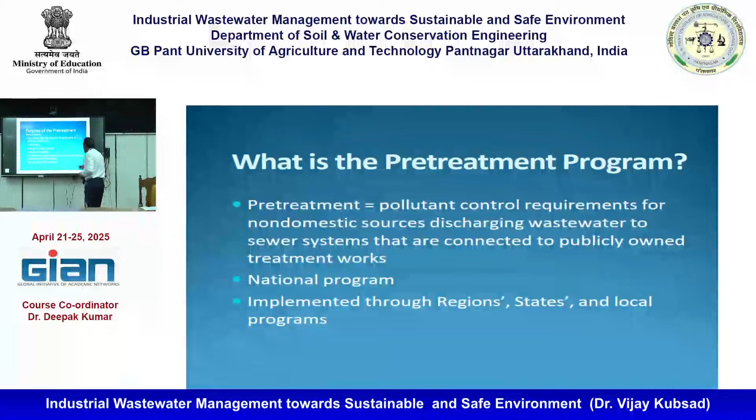So local limits apply to accept the wastewater. Accept means they can have a direct connection to the treatment plant or discharge to the sewer. They just cannot hide somewhere and discharge, there are heavy fines if they do that, because this program requires that whenever a new industry comes into the city or town, they have to get permission from the department on how they will take care of the wastewater generated. There are a lot of slides, but I'll go slow when you're ready.

Okay, the next purpose of the pre-treatment program, what is the purpose of this program? This program aims to prevent the introduction of pollutants into the POTW, POTW meaning the publicly owned wastewater treatment plant.

That way you can understand. Because why they call it POTW means because public money they construct. So they give the credit to the public, not to the government, right? Because your money runs the government. So that is how the US system works. Everything is freedom and pursuit of happiness. That is what the system is, right? So

to prevent introduction of pollutants into the POTW which will interfere with the treatment plant. That is, the city or town which runs this treatment plant has a right to prevent any wastewater coming to their treatment system. They cannot discharge any toxic stuff. They can stop interference. It should not cause any interference to their wastewater treatment plants. But you know how these treatment plants are built, because I also worked in consulting design, so we know the treatment plants we design have some limitations, how much they can treat.

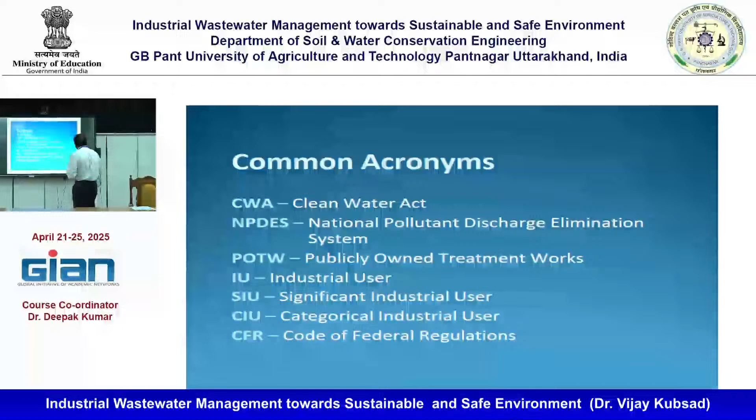Then common terms and phrases, I will go a little bit quickly. Approved pre-treatment program means sometimes the Department of Ecology authorizes some of the cities to run the program on behalf of us. Everything is not done by the government. So we say some cities have resources, staff, funding, everything. So then you run the program on behalf of us under these regulations. So in the eastern region, for example, there are certain cities we authorize. I oversee them. Every 2 years I see what they are doing, whether they are doing any enforcement or not, whether they are monitoring the tributary industries very carefully or not. So if the cities are strong, with more resources, we delegate them. Instead of government, you do it, we will oversee.

But if there are certain industries which are non-delegated, beyond their service area, then the department issues the permit to them directly. We oversee them. They have to report to us directly. Otherwise, delegated means the industries respond to the cities and then the cities respond to us. That is simple, right? So this is the approved pre-treatment program. Control authority, in the sense we tell the city, you are the controlling authority, you oversee all the industrial wastewater discharge, whether they are discharging properly to a wastewater treatment plant, and whether you are discharging to the river or to land application properly or not.

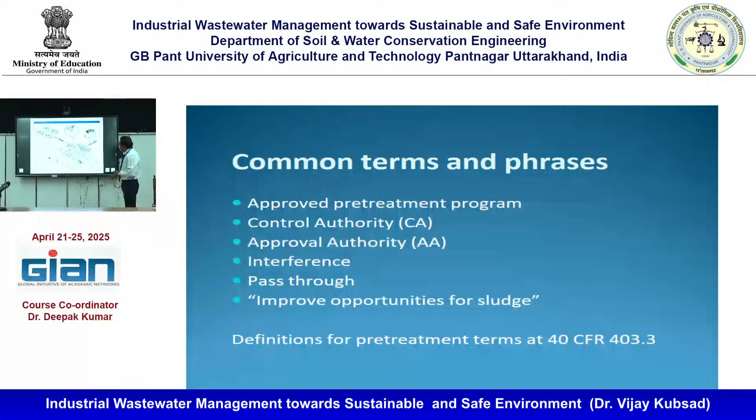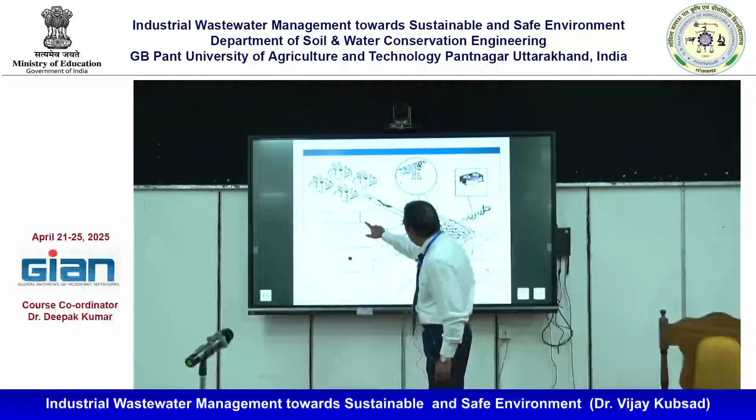So you see here how this program works. This is the treatment plant, correct? And there are different components here. Number one, corrosion of the collection system or the treatment plants, right? Then there are interferences, there are workers, and there is a pass through. The toxic substance will just pass through if it is not treated.

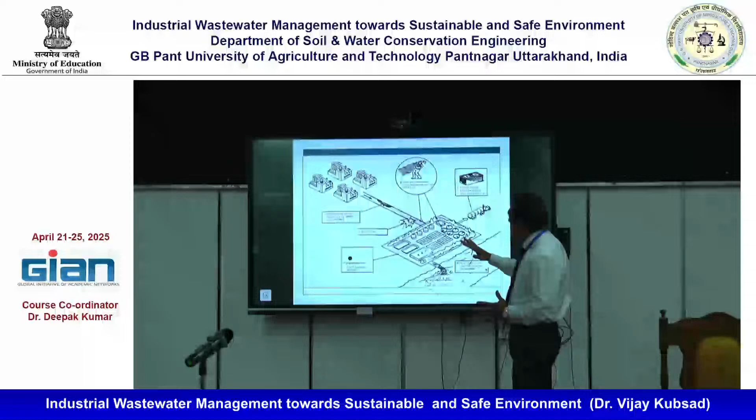So wastewater from the residential area is collected at the treatment plant. How is this going to affect it? It will cause corrosion. If the wastewater is coming from the industry, what happens? The ideal pH is about 7 to 9. Usually 6 to 11 we can permit for industries.

If it is low, 3, 4, what happens? It will cause issues to the sewer line. Sewer lines will be corroded. That low pH wastewater will react with the iron reinforcement in the sewer system and it will destroy it, right? So if the whole system is destroyed, then what happens if they are just discharging?

If there is some gasified wastewater, if it contains a lot of methane, if it is not properly maintained, there is a possibility that it may cause an explosion, right? Then there are also workers who are working in the treatment plant. You have to take care of them. People who work in the treatment plants are more vulnerable because they are dealing with toxic waste, always generating hydrogen sulfide or methane.

So proper protective equipment is very important for people. Without protective equipment, you cannot go into the treatment plant. With hydrogen sulfide, even a small quantity, if you are exposed continuously, people may die. You will not even know what has happened. If they are going into a manhole which has methane generation in a confined space, there is a possibility of death. It happens in many places, but people don't notice, but they are very dangerous.

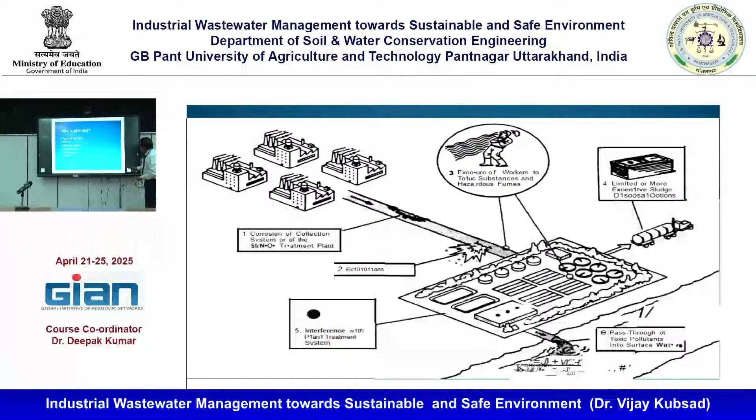What is affected, or who is affected in this whole system? Approval authority, POTW, industrial users, waste haulers, and commercial entities. If the wastewater contains contaminants or toxics, then all these stakeholders will be affected, right?

Then approval authority, what is the goal? Adequate implementation of a pre-treatment program. Legal authority, oversight responsibility, POTW pre-treatment program implementation, SIU and CIU pre-treatment program implementation.

How you implement? That is why you can understand how big the responsibility is, because it has great value for human beings, right? Without knowing it, they will be affected. That is why I was mentioning this course is important. It will give you a little bit of insight into how much our people are exposed to this kind of activities.

You can understand we have a limited space, a lot of people. If water quality is affected, then it will affect everywhere. It is not that if we drink bottled water and stay in air conditioning we will be safe. It is not like that. There are many contaminants which just pass through and you will not even know, because most of the treatment plants don't have tertiary treatment.

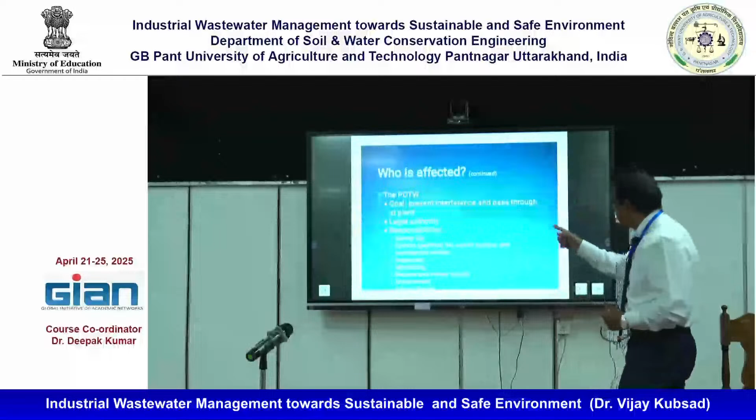Then the control: industrial users, waste haulers. But there are small industries. They say that I don't have any sewer system. My place is somewhere in the corner. I don't have any source to discharge it to your sewer line because your sewer line doesn't exist there. So they have made a provision for all of them. You just cannot blame that it is not there, which is our usual tendency. You cannot say.

Then they say haulers. They collect the wastewater. What they say is whatever the discharge, you collect in the tank, you have a hauler, he will take that to the treatment plant. You have to pay money, right? Because paying money for what we generate is important. That is how our people must know here also. It is not that you get things free, right? If it is free, then it won't have a value. So that is what it says.

There are some commercial entities; they say that their wastewater is slightly different from the domestic wastewater. Residential wastewater, in the sense, all which comes from the house. So commercial, if it is slightly different, they cannot discharge. They have to haul their wastewater to some other places unless it is domestic waste.

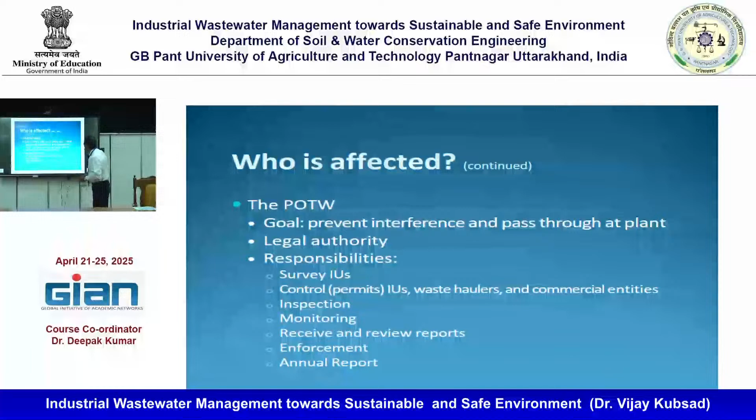Industrial user responsibility, that I have covered. Waste haulers and commercial entities, what are the goals? Local and state, federal, I have explained, where the local authority has a big responsibility. If it is federal, your regulations may be more stringent than the state regulations. It cannot be that local limits, or whatever you establish for your town to protect your town and cities, are much more than what the state and federal allow. That authority is given.

So, no hazardous waste responsibilities—they have to follow that authorization. It is mentioned very clearly that no hazardous material should be discharged. You cannot just throw batteries there or any contaminant without noticing. If you are found, then there is a heavy fine. The law is established like that, the system is developed that way. People, our people who go there, they follow the law. Here, if they don't follow it, the system is built so that it's enforced regardless.

So hazardous stuff should not be there. If it is hazardous, then there is a big issue. There is a separate department that will come and smash everything—that is a separate matter. If it is hazardous, that is what your authorization clearly mentions: it must not have any hazardous substance.

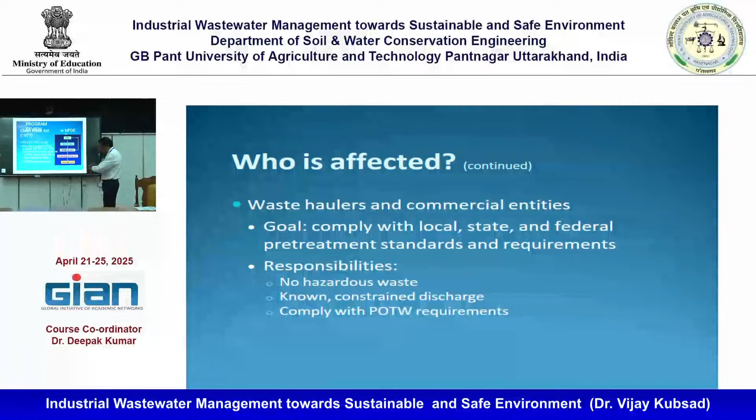Is that okay? Okay, so I will cover one more slide and then we'll go. This is a little messed up. That's fine. Program review—I want to tell you a little bit about the 1977 Clean Water Act, which is the revolution in the field of environment.

Why is the US Environmental Protection Agency, the state government, more famous in the world for this? Because even when we were there, we used to study about this Clean Water Act, and because the US is the one country where they have established the guidelines, rules, regulations for their system. But now the whole world everywhere is following it. So that is how this Clean Water Act is more famous.

So this started—other websites you can always search. Point sources must obtain an NPDES permit, EPA or their delegated states. What does that mean, the delegated states? I said our state government and the EPA is the central body, federal. We collaborate there. So that is how, if a city says no, we don't have that much—NPDES in that sense, you can understand it that way.

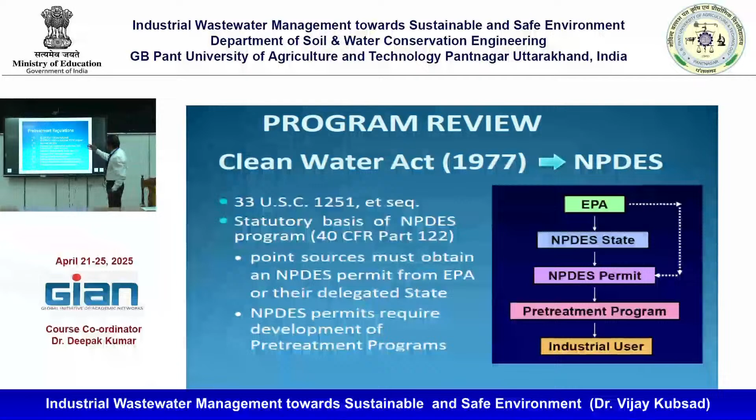Then there are others I will not go into. It's 1973, with little changes in the format. We'll have to fix that one later.

So these are some of the federal codes. Under 40 CFR 403 is the pre-treatment program and approval deadlines, pre-treatment implementation review - how it is developed, started from 1973. Step by step, that is how we will have to do it here also. I have worked in regulation also when I was in IIT. Rules are there, but they have to be implemented properly.

So at different years there have been domestic sewage studies. To decide or design any treatment plant, you will have to have a feasibility study. You design the treatment plant based on volumes, characteristics, and future expansion. But when you design any treatment plant, you design it for 30 years, not just for today - in 30 years your plant should still be good, and today it should also be good. That is how all treatment plants are usually done.

Then the Congress rules, regulations, and DSS regulations, and removal of credit pollutant eligibility - that is also there. If there are priority pollutants produced by a particular industry, there is a regulation requiring treatment for that.

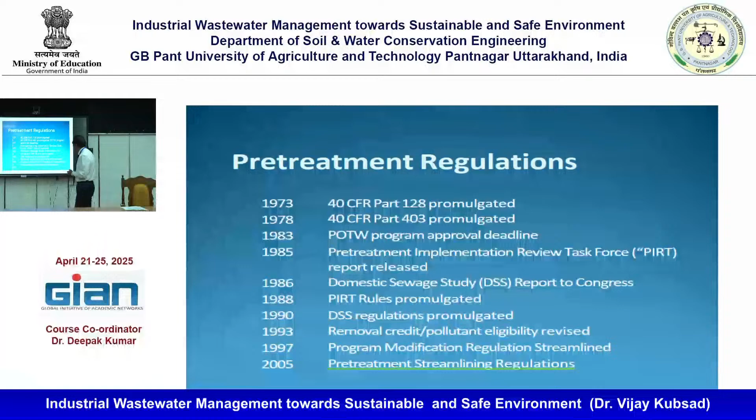This is Federal Code 40, which deals with environmental protection - Protection of Environment, Chapter 1, Environmental Protection Agency. These are the regulations under which, if you read this, the whole system is there - how the pre-treatment program is designed, which is what I am telling you right now. Oh, it missed something.

Program implementation - who must develop a program? POTW, meaning the city wastewater treatment plant which has a capacity of 5 million gallons, can have the authorization. You cannot, if it's a small town, say give us a delegation and we will run whatever - don't ask me, it is not like that.

If it's a big, substantial town with a treatment plant of 5 million gallons - pardon me, gallons, here it's in liters, liters times 3.7 gives you MLD, and here we design on MLDs - so if they have a capacity of 5 million gallons, nearly 4 times in liters, then they can ask for authorization. We are a big city, we want to run our program, you can oversee it, but we should have authorization - we will look after all industries in our service area and follow all regulations. So they can apply for that program. We will review their engineering, check whether their treatment plant is as per design, really doing a good job, has all resources, and is capable of maintaining discharge from the whole town. Then we authorize them - okay, you can do the treatment plant.

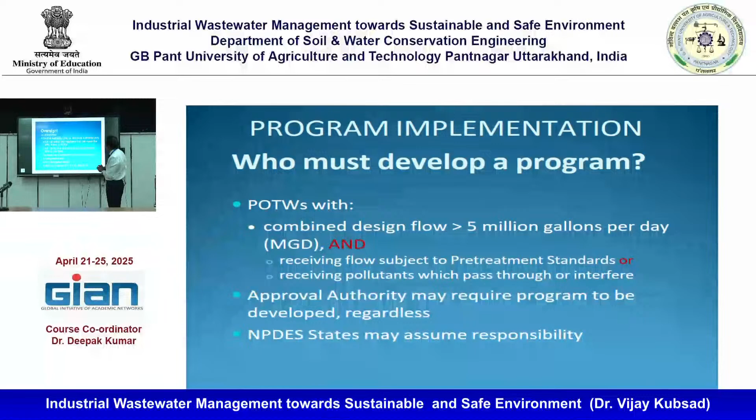Then oversight authority. Oversight authority means there are many people watching you all the time - federal regulations, state regulation, local, controlling authority. All will see. Young people, engineers and operators, they will go and take samples to make sure that everything is going well.

The entity that oversees, AA, means EPA and state. If we give authorizations to the city, towns and industries, we directly oversee that program, depending upon the pre-treatment authorization status - delegated status or non-delegated status. That is what I was trying to say: if a city is authorized, that means it is delegated. If it is not, we oversee directly.

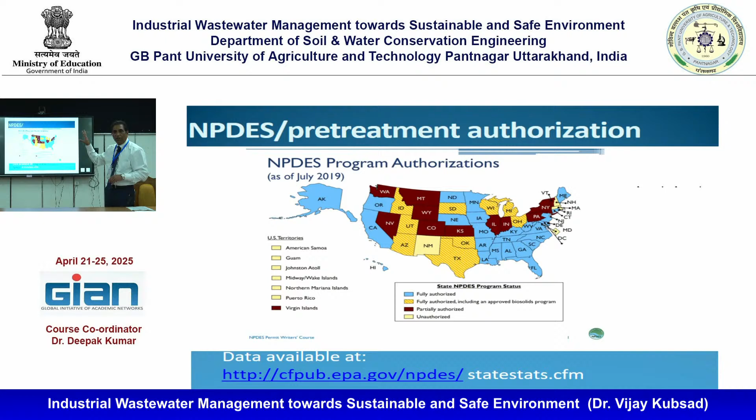So these are the states where the program is implemented, all over the state, all over the country. Then some are delegated, and a new state where they don't have resources - EPA directly involves and starts doing the things. It is not that the system is not there, you can just do anything - it is not like that. There are three layers of coverage: one is the EPA, the central federal level, state level, and local level.

Local level is also very active. They say we want our city - city towns are not run like a business where we don't do anything, we don't pay tax, no. Cities are also like that, small towns - if you don't have a resource, we will provide you a resource, we'll fund you, but you have to run your town or city as per the regulation. It is not that you don't have anything and I will just do it - no, that is not there.

That is why it is very important in the field of environmental engineering, why so much progress is done. So these are the states where things are done - fully authorized, partially authorized, unauthorized - where the EPA or central federal government can directly oversee. So there is someone to watch you, provide you the regulation, and watch what you are doing, what is happening.

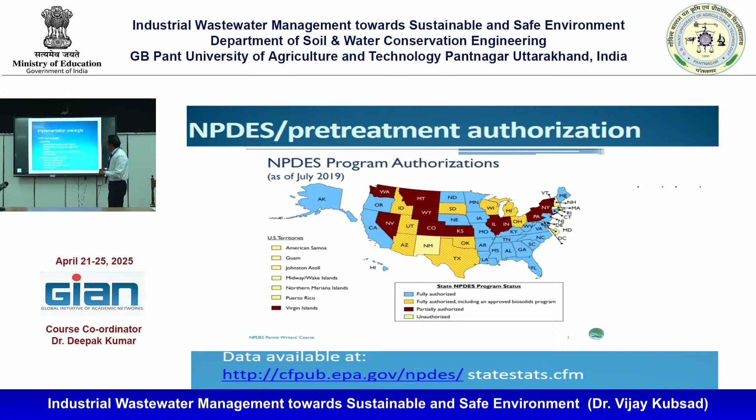So implementation, oversight, the POTW receive, review, how that program is done. I want to give you quickly a little bit about that. So direct oversight, industrial users and POTWs, which are authorized by EPA and state. So what happens is, cities are either authorized by the states, so they can run the program, or the department, the pollution control board, what you call here, runs the program directly. That means we run the program directly.

Then if it is the direct oversight, if there is a non-delegated area, if in a small town one industry is there, then we enter there, we do everything, and they have to follow the rules. Of course, when they are discharging, nothing is free. That is one thing we should understand. Whatever you contribute, you have to pay money for that. So that is how this system is done.

Receiving, reviewing annual report. If we authorize, the city has to report. They report to me for the eastern region. I see, oh, this is not going well. No, this is not acceptable. You have to do it this way. Otherwise, we will withdraw. That is a big enforcement there.

No one can escape. Because then pre-treatment compliance inspections, we do audit, go and see. I do that for many cities. I go and see what they are doing, 2 days, how their treatment plant is running, how they are doing the regulation. If anybody violates, what will they do? I don't want them to be a friendly person: you do anything, I will okay. No. If it happens, what you have done, what action you have taken.

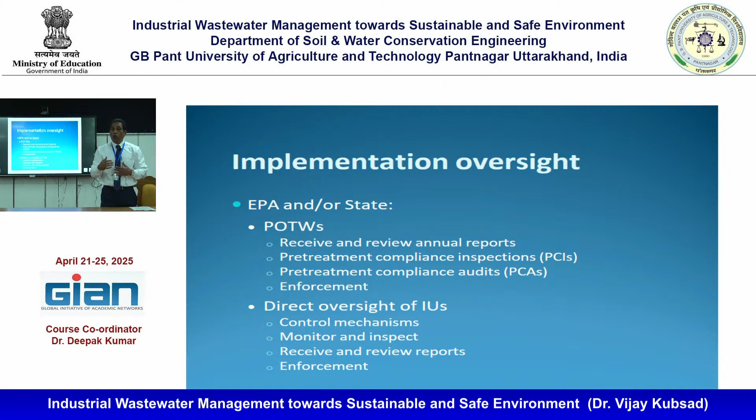And direct oversight means if there is nothing, no resources, no cities want to come forward to take the responsibility, then we issue the authorization directly. They still discharge it to the city or town treatment plant, but they pay money. They have an agreement. The city can always say, we don't want to take your wastewater because this is the worst. You have to do this, watch on them, right?

So that is there. For example, aeroplane manufacturing is there, automobile manufacturing is there. They use a lot of chemicals, right? Those chemicals will just come with the water, right? So in that case, there are some industries that produce toxic ones, as categorical. It is left to you. You will assess. That is what I said. When a new industry comes in, what happens? They will do an application: these are the industry, these are our problems, these are our products, and also we tell them to submit an engineering report.

A professional engineer will evaluate and make sure that this is the industry, it produces this many toxics, these many things, how they will take care, how they will give a pre-treatment. They say that we will give a pre-treatment, we have a primary settling tank, we have a clarifier, we do this much and then discharge. Okay, then we will stop.

Then accordingly, if it is a new one, sometimes it is hard to fix the limits. We give general limits. Then we say that after 6 months, it is going a little bit this side, so we revise that. We make sure that they are treating their stuff properly. So that is the category.

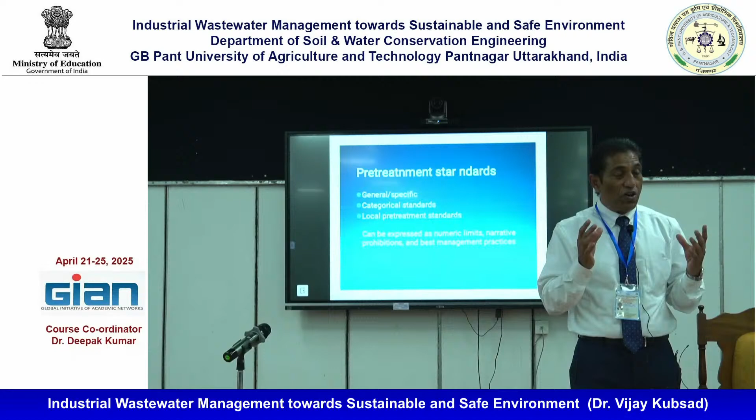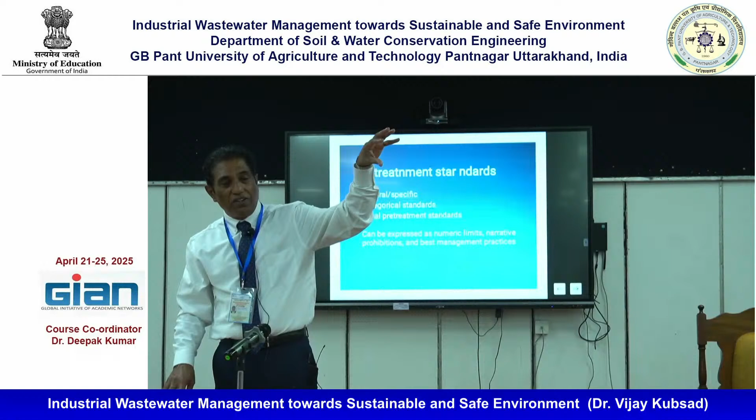They may have stringent rules, but you see, if you have a town where the river is flowing and you have a certain kind of fish that needs a high oxygen content in the river, you cannot just discharge and spoil the entire river, right? Many people depend on the fish. And also drinking water. You cannot discharge wastewater there which will cause a drinking water problem down the way. After 10 kilometers, 20 kilometers, there is a town, they should not suffer a problem.

So these are the things, they are all evaluated. That is how it is evaluated when the industry comes in. By this time you can understand how they screen all the industries. There is no way that they can just come and start discharging anywhere. So these are the processes. Until they say go ahead, they cannot start. So that is how the system is built.

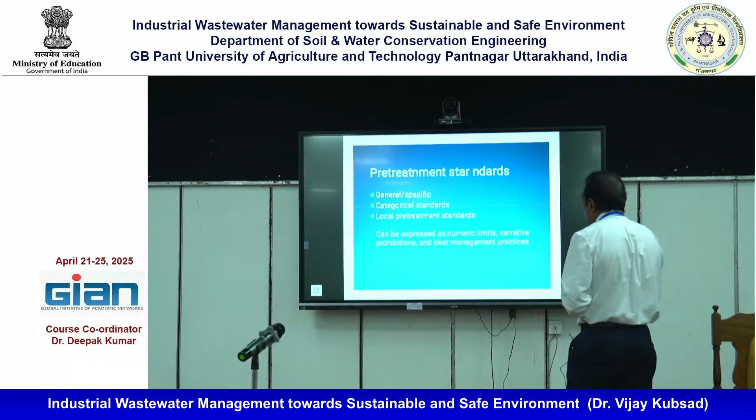It can be expressed in numeric limits, narrative prohibitions, and best management practices. Best management practices I want to highlight a little bit. So what happens is, in a town there is a car wash, right? A car wash sometimes produces toxics, oil and grease. If they just wash everything and discharge to the sewer, no, it won't work.

Because oil and grease discharged to the sewer line ultimately goes to the wastewater treatment plant. If oil and grease is there in the wastewater treatment, it will reduce 50% of the treatment efficiency. It forms a layer on the suspended solids. It just spoils your entire system. The biological system is destroyed. So that is why even if they are doing a car wash in the town, they have to take permission from the city.

They will say these are best management practices: you are a small unit, a commercial unit, but you cannot do this. What you can do? You have a grease trap before everything is washed. You will remove the foaming stuff, soaps and everything, and then you will discharge. You follow the best management practices. You have to pay this. We will inspect. They cannot violate.

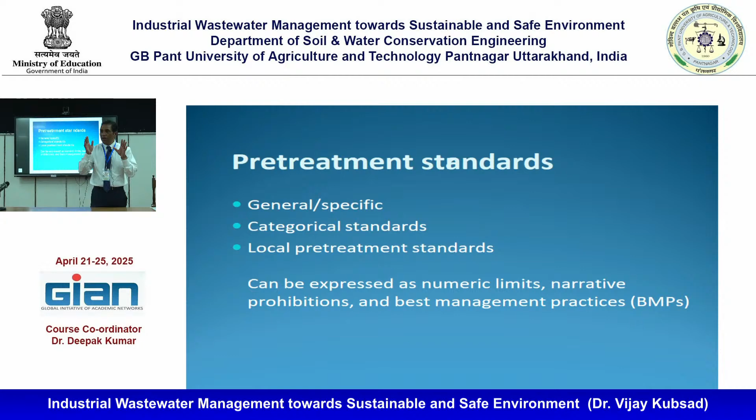And there is a person who can come every month, every week, or depending upon its capacity, they remove the oil and grease, then they put the same one back, but the oil and grease is removed from the system. They take it for the treatment. That is another process which we will not focus on.

They collect from different places. I have an industry which does that, which collects all this oil and grease from different industries, different restaurants, then they treat it. They make so many products out of it. So that is how it is done.

So that means even the small restaurant is tracked. So that is how McDonald's or any other small restaurant there. So that is mandatory. They cannot escape the system. So narrative prohibition and best management practice. So this is a general prohibition.

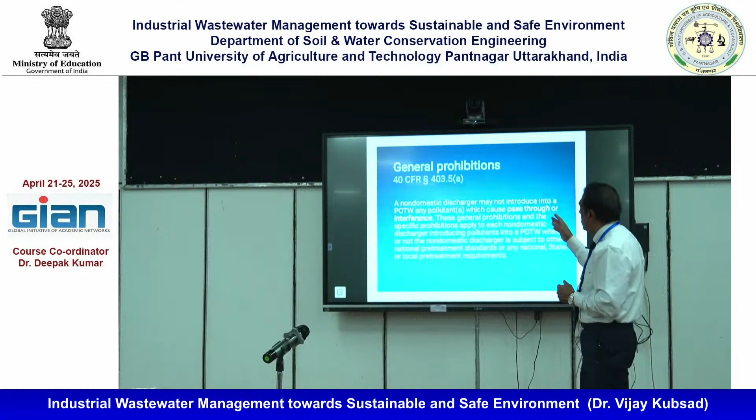Non-domestic dischargers may not introduce into the POTW any pollutants which cause pass-through or interference. That is the law. Any commercial unit or any industry discharging wastewater to the treatment plant, they should not cause any interference and pass-through. That is the law. That is the baseline.

They can always say that they will not be taking their discharge. They have the right. They can stop accepting the wastewater coming from the respective industry. So it is a prohibition, and the prohibition applies to each non-domestic discharger introducing pollutants into the POTW, whether or not the non-domestic discharger is subject to other national pretreatment standards or any national, state, or local pretreatment requirement.

See, such an important topic. No one can tell them that you accept it however it is. No, they can deny. It is creating a problem, issues with our wastewater treatment plant. You cannot just discharge. Imagine there is a restaurant, there is a commercial unit. If they are discharging and the regulator says no, don't discharge, they have to stop.

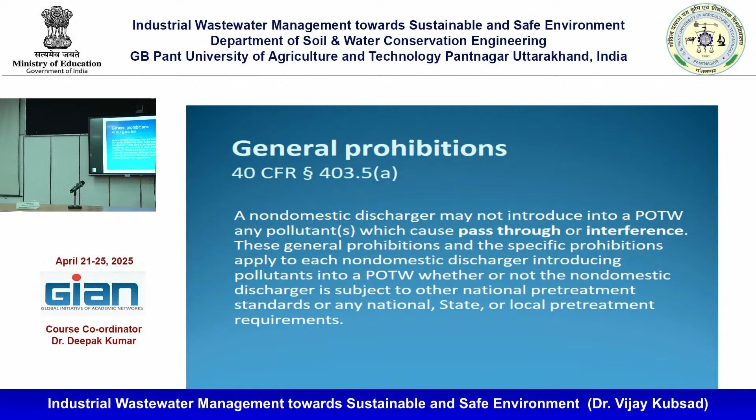Specific prohibitions, because there are a lot of systems, a lot of laws. Specific prohibitions means pollutants which create an explosion hazard. If you are discharging something which has a lot of methane, a lot of toxicity, which causes an explosion. That is why what each industry, each unit is manufacturing is important, right? If something is coming into the system, your sewer line may blow up, and it may cause a problem to the whole treatment plant.

You don't want to mess up the whole treatment plant which is built by the people, just because of one industry, one person. It is not a right, it is a privilege. You are helping them by accepting the wastewater. You can understand the philosophy, how this is built and how it is working. That is why I am trying to tell you that the system which is built is working, right? So how best we can do it, that's all.

Then pollutants which cause corrosive structural damage to the POTW. If he is discharging wastewater which has a pH of 3-4, what happens? All the sewer system will be corroded, right? Your whole treatment plant, all the iron or everything there, will just spoil in 5 years. Do you want to accept that?

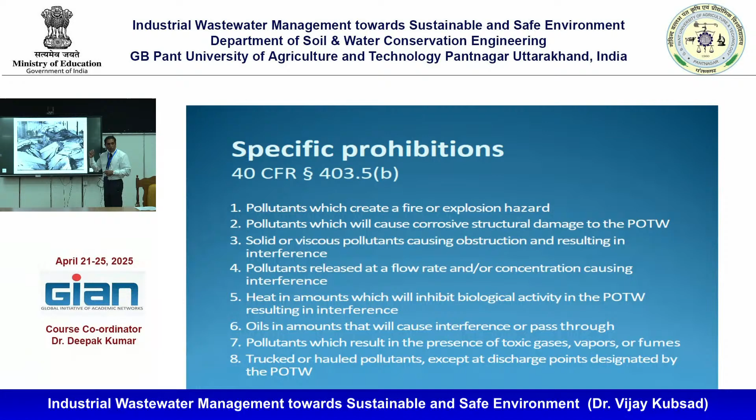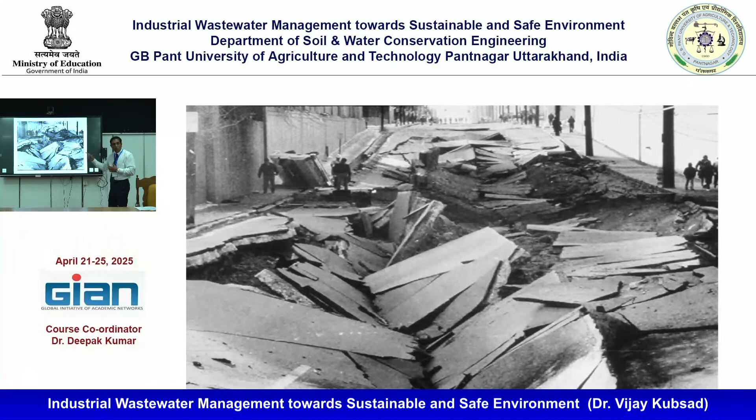I want to just show you some pictures quickly. So if methane is there in the sewer system, it can blast. So these things have happened. They have learned the lesson. Once the system is screwed up, then you have to have a law. You cannot discharge these toxics. See, if it happens, it will spoil the entire system.

If they are putting low pH wastewater all the time to the system, if you are not doing the things properly, what happens? They are not discharging to the treatment plant. They are discharging it to the sewer line. If a big industry is there, they can have a direct pipeline because they cannot just discharge big volumes to the sewer line. So small industries, if they are discharging it to the sewer line, what happens?

Explosion and corrosion occurs, low pH and toxic substances. If they are discharging wastewater which consists of hydrogen sulfide, what happens? Hydrogen sulfide reacts with water, forms sulfuric acid, right? Even if it is a low concentration, it will start corroding the sewer lines. People can go down directly. So that is a different aspect.

But your whole treatment system is spoiled because people who are there in the system are not doing the right thing. So that is why these laws came into existence. You built a system, sewer system, treatment plant, spending crores of rupees. If it is not working, who is responsible? I heard one example. I can give you that example later.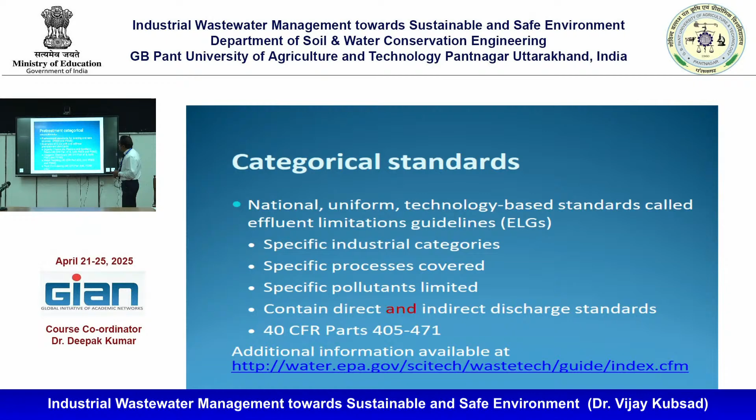And categorical industries: they want to be more focused on categorical industries because they produce a lot of toxics. As they develop, they put in a lot of new regulations. Organic chemicals, plastics, synthetic fibers are covered under this. Inorganic chemicals, metal finishers, paints are there. We have the credit of making these pollutants, but not taking care of them, right?

So now when we know, we have to have a solution, right? That is why this information tries to cover it: have a judgment, make sure that you will reduce, manage by the treatment plant, or remove completely. So that is the philosophy.

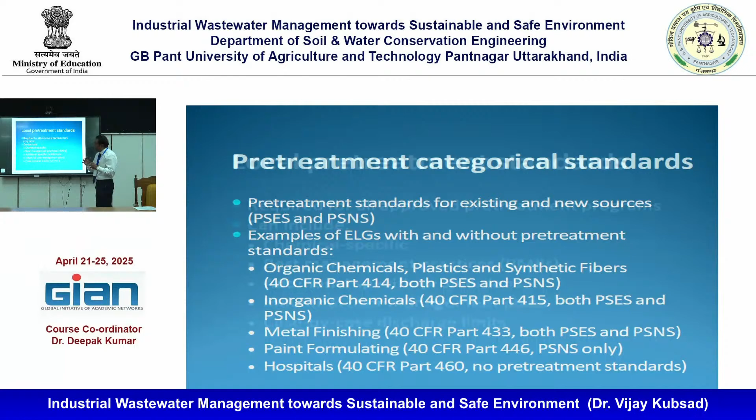Local authorities have more privilege, more rights to protect their treatment plants. That is why they can put limits. Suppose a big monument is there and there is no clause for air pollution; you can say this is a monument we want to protect. So these are local laws. They may not be central, but those local laws still have to be followed.